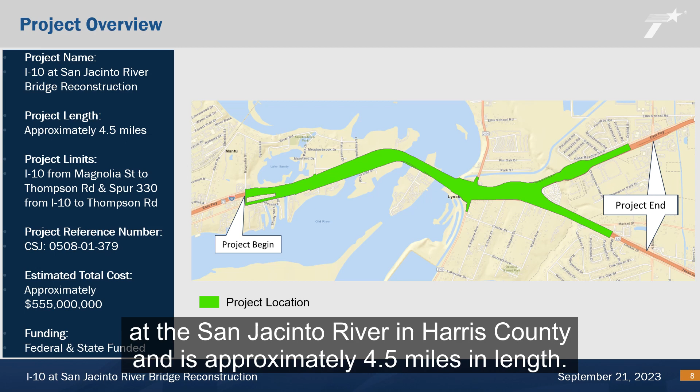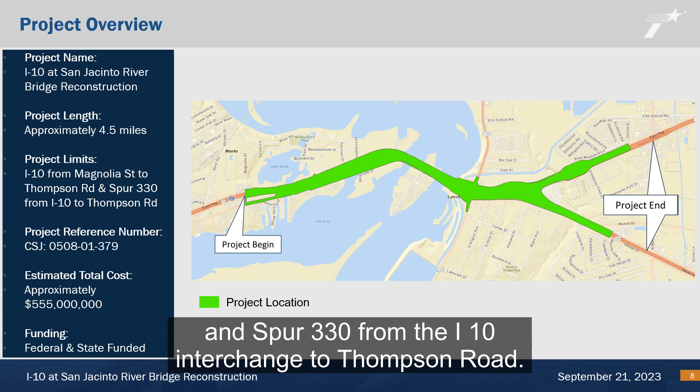The proposed project is located at I-10 at the San Jacinto River in Harris County and is approximately 4.5 miles in length. The project limits are I-10 from Magnolia Street to Thompson Road and Spur 330 from the I-10 interchange to Thompson Road, and the project reference number is CSJ 0508-01-379. The project is funded by federal and state funds, and the total project cost estimate is $555 million.

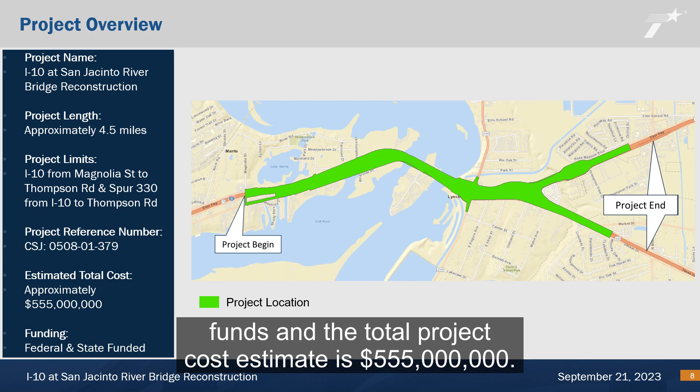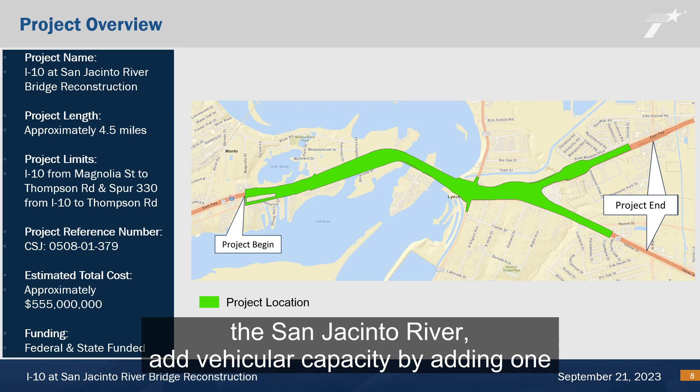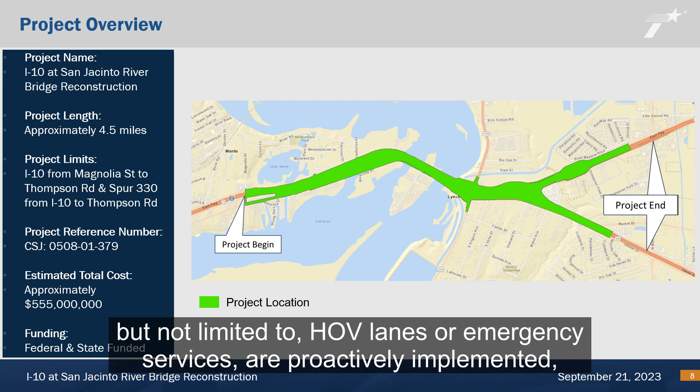The proposed project would replace the existing I-10 main lane bridges over the San Jacinto River, add vehicular capacity by adding one general purpose lane and two managed lanes in each direction. Managed lanes are highway lanes where operational strategies such as, but not limited to, HOV lanes or emergency services are proactively implemented and managed in response to changing conditions.

Proposed improvements along Spur 330 include widening to add one managed lane in each direction and connect to the proposed I-10 managed lanes. This information can also be found in the project handout for quick reference.

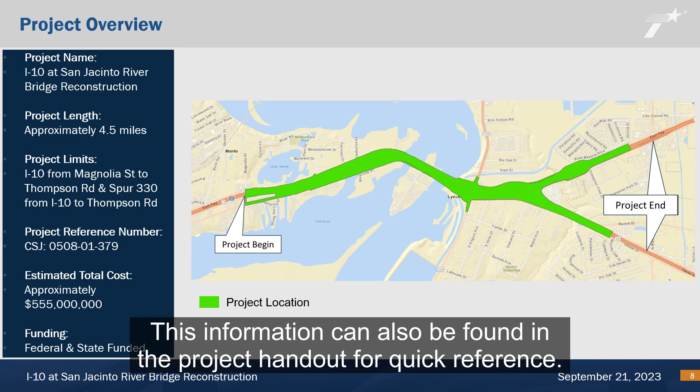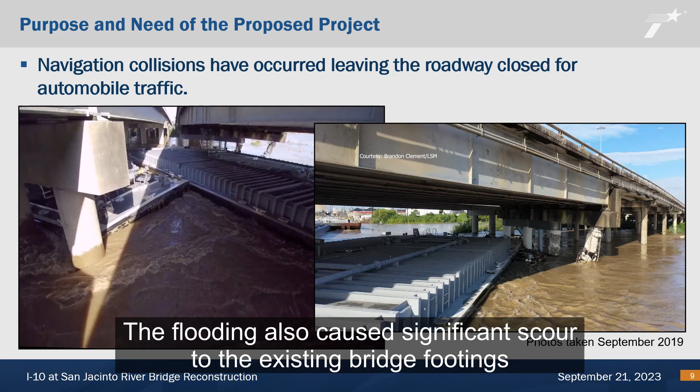In the next several slides, I will discuss the need for and purpose of the project. The flooding during Tropical Storm Imelda had several barges break their moorings and impact the existing bridge protection system, causing substantial damage. The flooding also caused significant scour to the existing bridge footings, causing the need for repair.

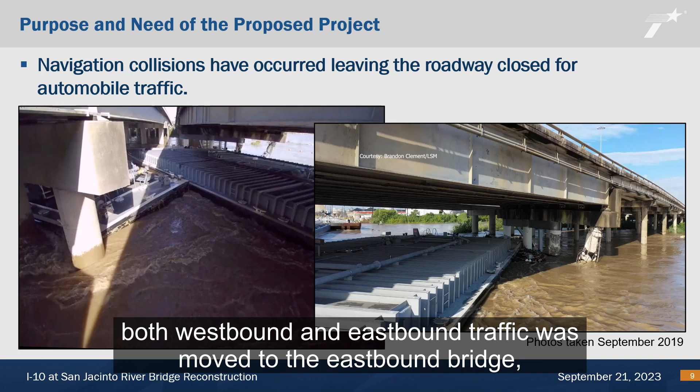During one of the barge strike incidents, the damage required the westbound main lanes to be closed during the repair. Both westbound and eastbound traffic was moved to the eastbound bridge, requiring lane reductions resulting in significant traffic delays.

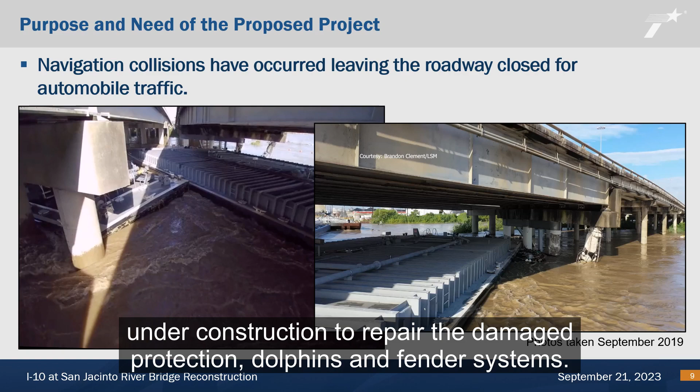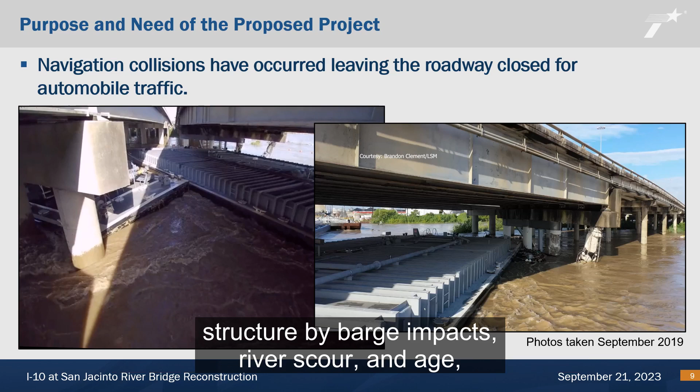Currently, there is a retrofit project under construction to repair the damaged protection dolphins and fender systems. The bridge structures currently in use were constructed in 1968 and 1996. Due to the frequent damage to the existing structure by barge impacts, river scour, and age, the bridges are programmed for replacement.

The Houston District has multiple planned projects along the I-10 corridor across the district. The managed lanes are programmed to run from I-69 to SH-99, a distance of almost 30 miles. Because replacement of the bridges over the San Jacinto River is the highest priority for the district, and due to the cost associated with constructing new bridge structures, it is preferred that the managed lanes be constructed at the same time as the bridge replacements. As such, this section of I-10 would be the first in the series of managed lanes to be evaluated. These managed lanes would help provide congestion relief within the project corridor itself.

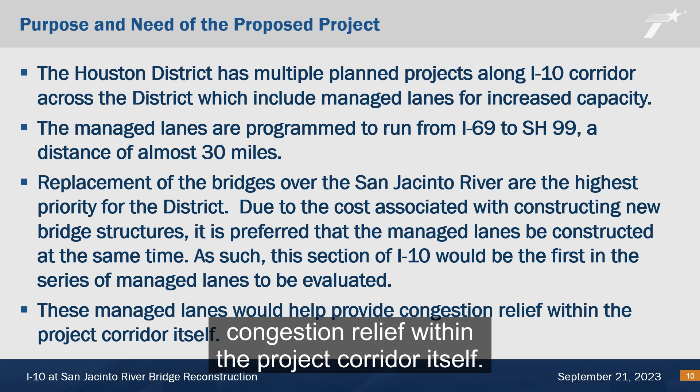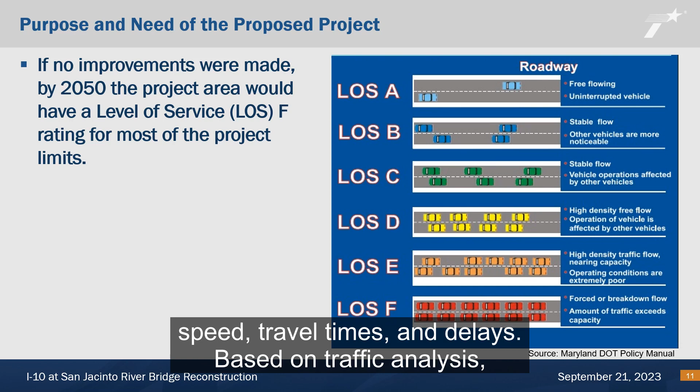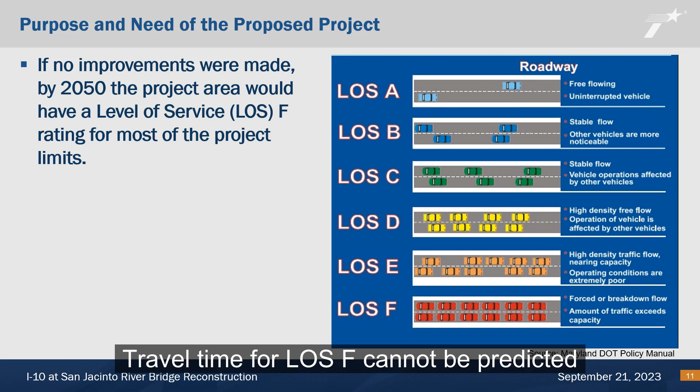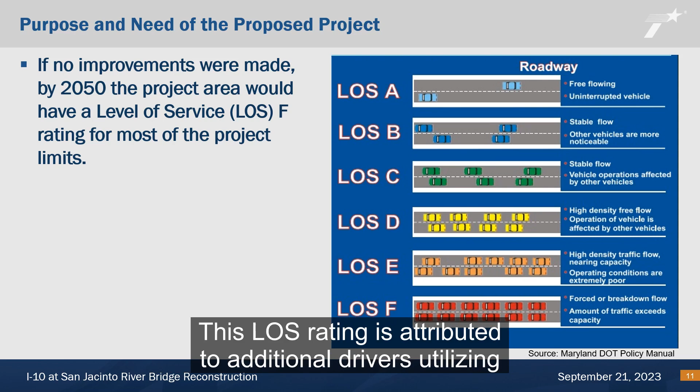Level of service, or LOS, describes conditions of a roadway based on driving speed, travel times, and delays. Based on traffic analysis, if no improvements are made by 2050, this section of I-10 is shown to have an LOS rating of F. An F rating is the worst rating possible in terms of LOS, meaning there are frequent slowdowns and traffic jams. Travel time for LOS F cannot be predicted as there is more demand than capacity on the roadway. This LOS rating is attributed to additional drivers utilizing the roadway than what is currently using the roadway today.

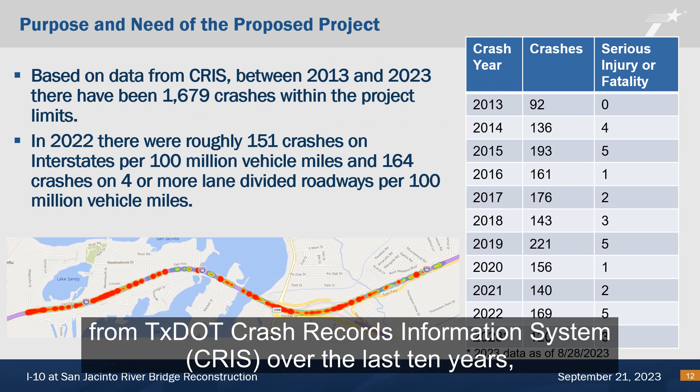Based on data from TxDOT's Crash Records Information System, CRIS, over the last 10 years, there have been 1,679 crashes within the project area along I-10. The heat map shows the areas of crashes with a fairly even distribution of location of crashes.

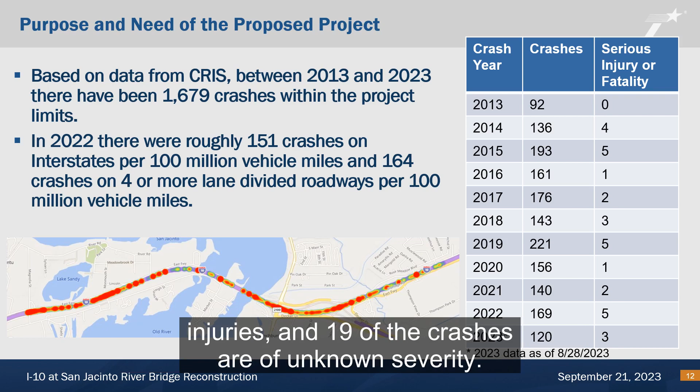As shown in the table, there have been over 100 crashes each year on this area of roadway since 2013. Note that there are already 120 crashes this year as of August 28th. Within the last 10 years, 31 of the crashes have resulted in serious injuries or fatalities. 284 crashes resulted in possible or minor injuries, and 19 of the crashes are of unknown severity.

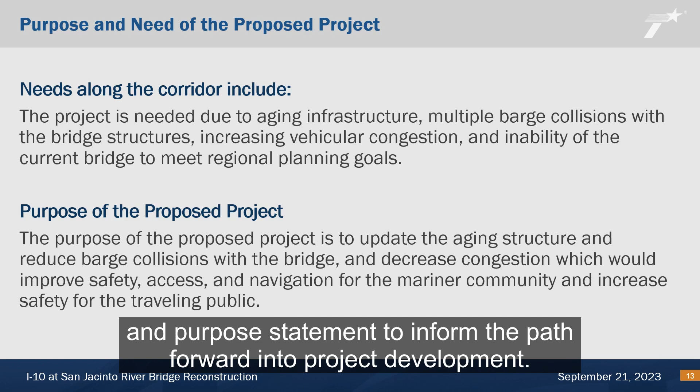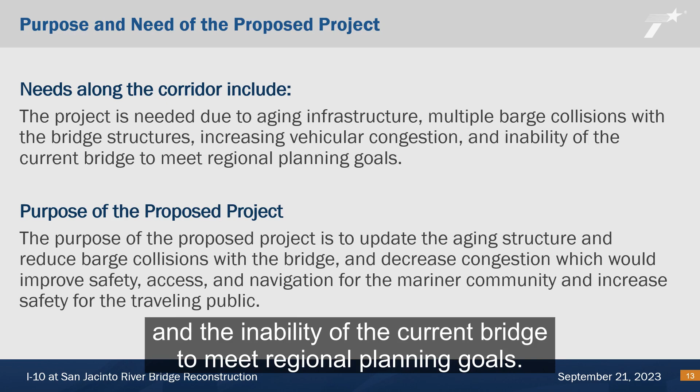After reviewing all the needs of the corridor, the project team developed a need and purpose statement to inform the path forward into project development. The proposed improvements would need to satisfy all the needs of the corridor and meet the purpose of the project. The project is needed due to aging infrastructure, multiple barge collisions with the bridge structures, increasing vehicular congestion, and the inability of the current bridge to meet regional planning goals.

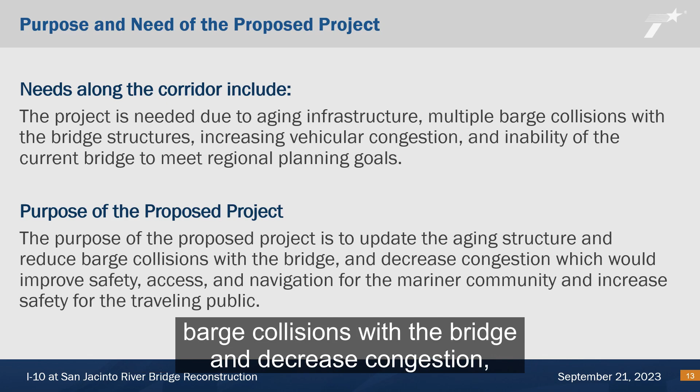The purpose of the proposed project is to update the aging structure and reduce barge collisions with the bridge, and decrease congestion, which would improve safety, access, and navigation for the mariner community, and increase safety for the traveling public.

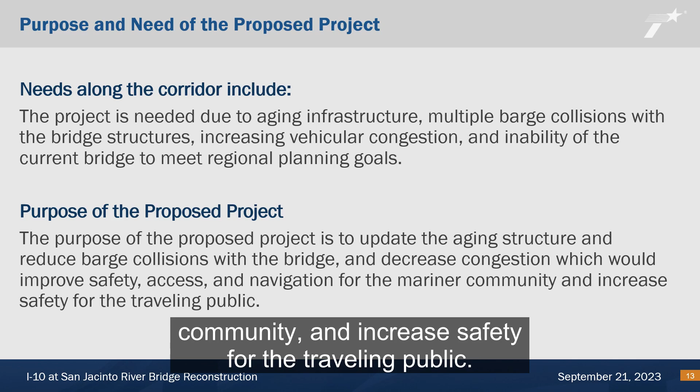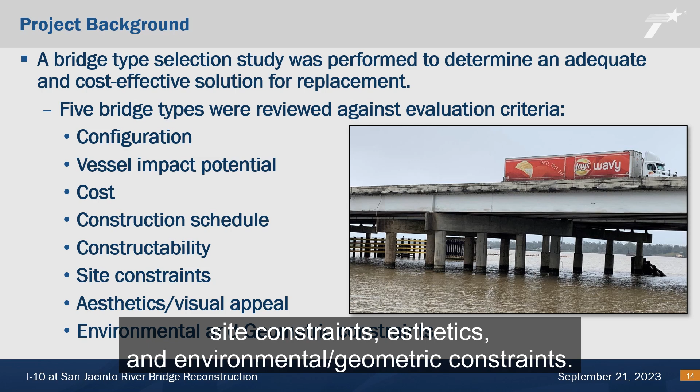A bridge type selection study was performed to determine an adequate and cost-effective solution for replacement. 5 bridge types were reviewed utilizing set evaluation criteria. Evaluation criteria categories included configuration, vessel impact potential, cost, construction schedule, constructability, site constraints, aesthetics, and environmental/geometric constraints. After evaluation of all criteria, concrete girder bridges, like the one shown on this slide, were recommended for the new bridges.

A navigational clearances report was prepared to review waterway obstructions with existing clearance envelopes, limited vessel survey, and marine facilities within a 3-mile radius of the proposed project.

TxDOT completed outreach efforts to notify the surrounding mariner community about the upcoming bridge replacement and to collect stakeholder input. The outreach efforts included identifying the appropriate mariner community stakeholders, holding a virtual meeting with presentation, and sending a navigational questionnaire to the mariner community stakeholders. The virtual meeting occurred in August 2021, and the navigational questionnaire was sent to 70 members of the mariner community in August and November 2021.

After the initial mariner community stakeholder outreach efforts, TxDOT developed bridge design alternatives and presented feasible options to the Lone Star Harbor Safety Committee in June and July 2022. The questionnaire was sent to the mariner community again after the June 2022 meeting with the Lone Star Harbor Safety Committee.

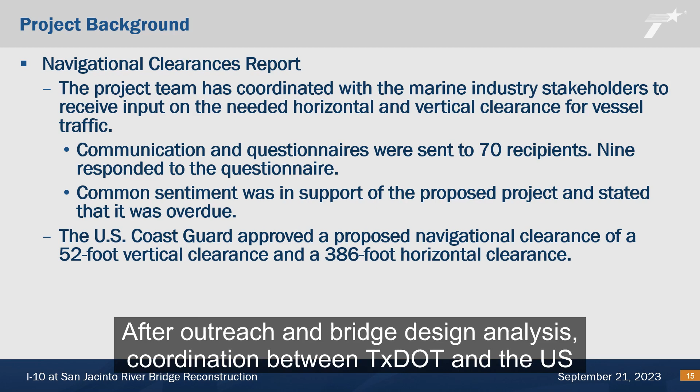After outreach and bridge design analysis, coordination between TxDOT and the U.S. Coast Guard, USCG, occurred. Through this coordination, USCG approved the proposed navigational clearance, consisting of a 52-foot vertical clearance and a 386-foot horizontal clearance.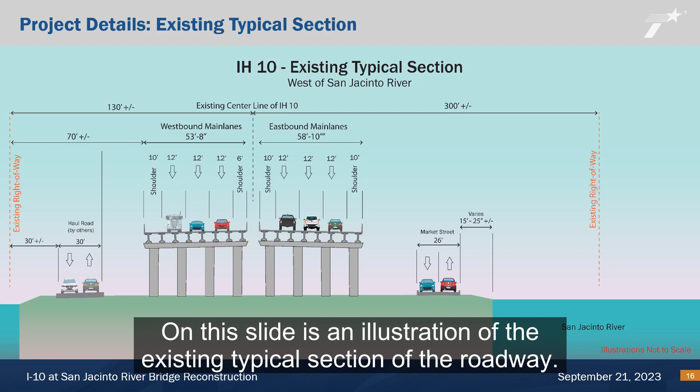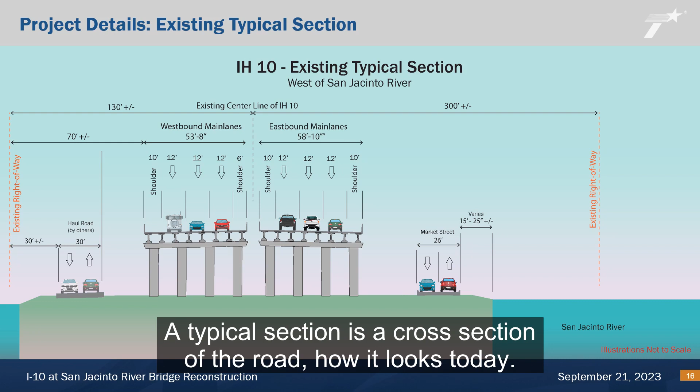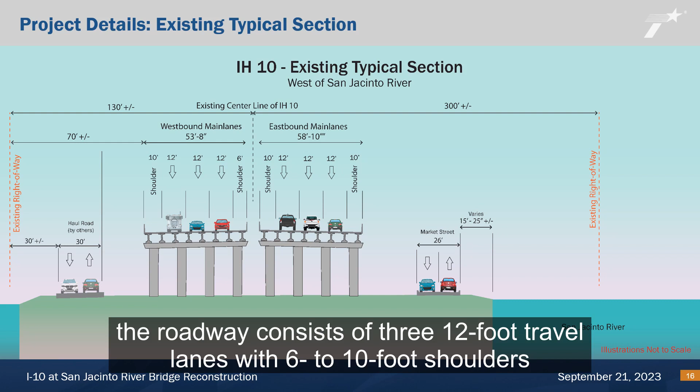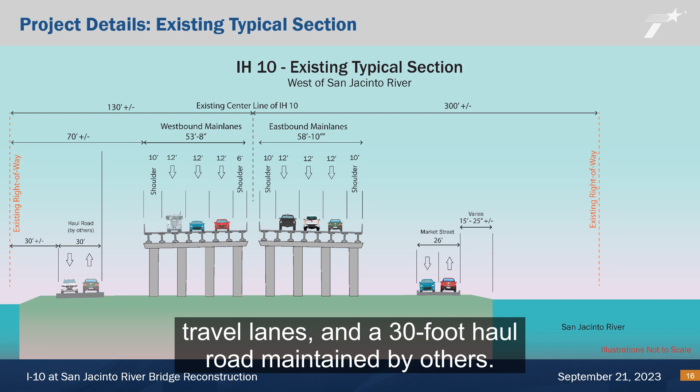On this slide is an illustration of the existing typical section of the roadway. A typical section is a cross-section of the road how it looks today. The roadway main lane and frontage roads vary in number and configuration, but at this location, just west of the river crossing, the roadway consists of 3 12-foot travel lanes with 6 to 10-foot shoulders in each direction, Market Street, consisting of 2 13-foot travel lanes, and a 30-foot haul road, maintained by others. The right-of-way varies throughout the corridor as well.

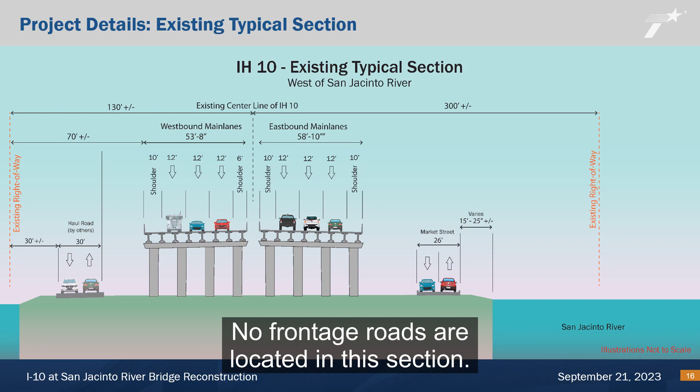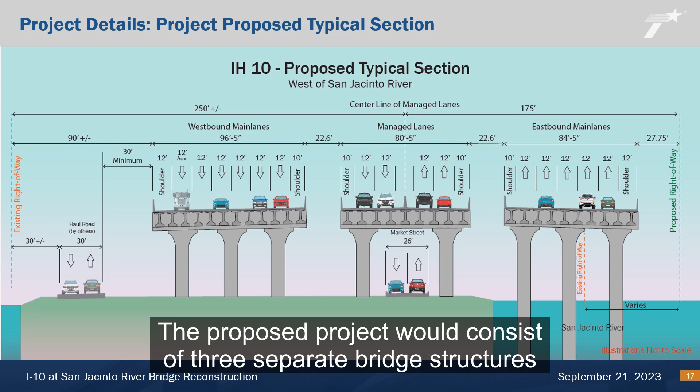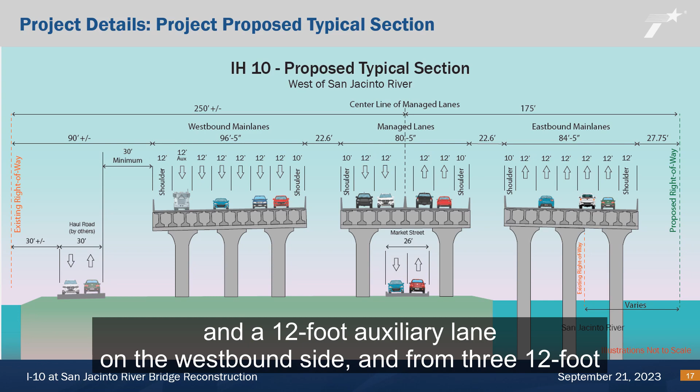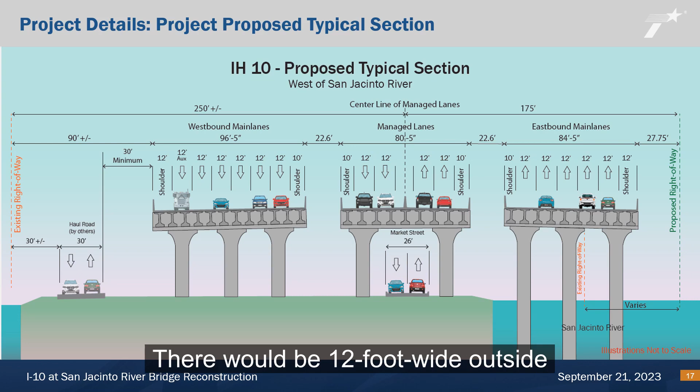This slide illustrates the proposed typical section, or a cross-section of what the road would look like with the proposed project. No frontage roads are located in this section. The proposed project would consist of 3 separate bridge structures and would widen the main lanes from 3 12-foot travel lanes to 5 12-foot travel lanes, and a 12-foot auxiliary lane on the westbound side, and from 3 12-foot travel lanes to 5 12-foot travel lanes on the eastbound side. There would be 12-foot wide outside shoulders and 10-foot wide inside shoulders on both east and westbound travel lanes.

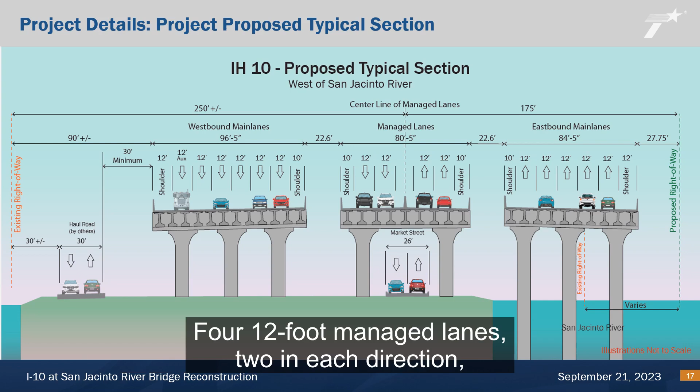Four 12-foot managed lanes, two in each direction, would be between the eastbound and westbound main lanes, with a 5-foot barriered separation and 10-foot outside shoulders.

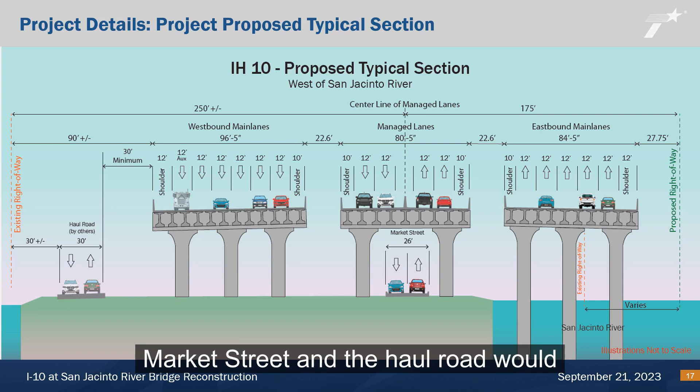Market Street and the haul road would remain unchanged at this specific location, just west of the San Jacinto River.

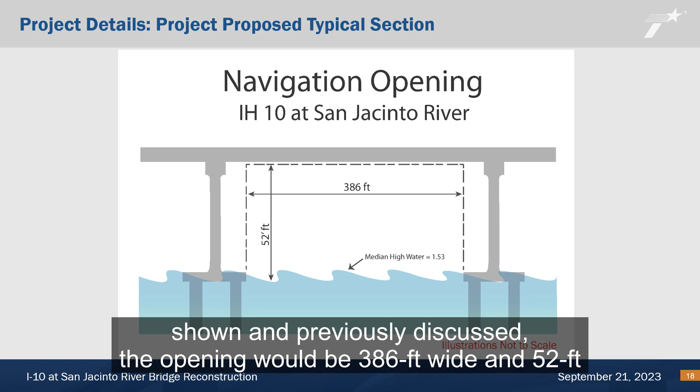This graphic illustrates the proposed navigation opening if the proposed project is constructed. As shown and previously discussed, the opening would be 386 feet wide and 52 feet high, with the median high water mark being 1.53 feet.

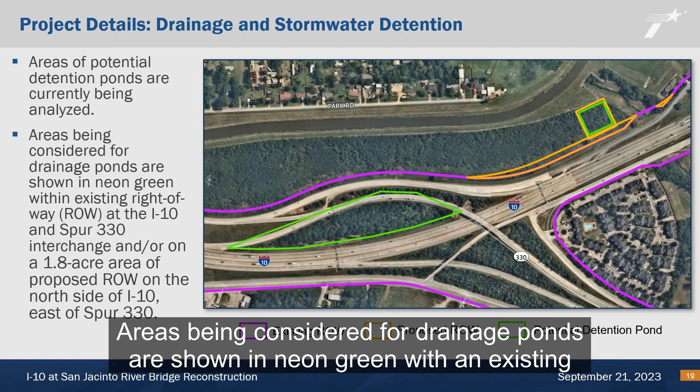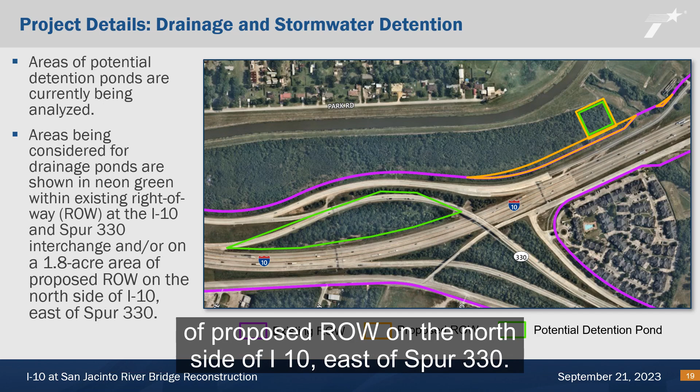Areas of potential detention ponds are currently being analyzed. Areas being considered for drainage ponds are shown in neon green within existing right-of-way at the I-10 and Spur 330 interchange, and/or on a 1.8 acre area of proposed right-of-way on the north side of I-10, east of Spur 330. The proposed project would require approximately 5.4 acres of new right-of-way.

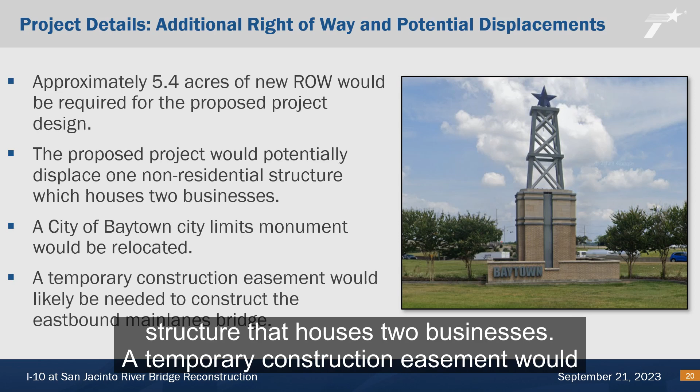Additionally, the proposed project would potentially displace one non-residential structure that houses 2 businesses. A temporary construction easement would likely be needed to construct the eastbound main lane bridge. The areas in orange are the areas where additional right-of-way would be needed for the project.

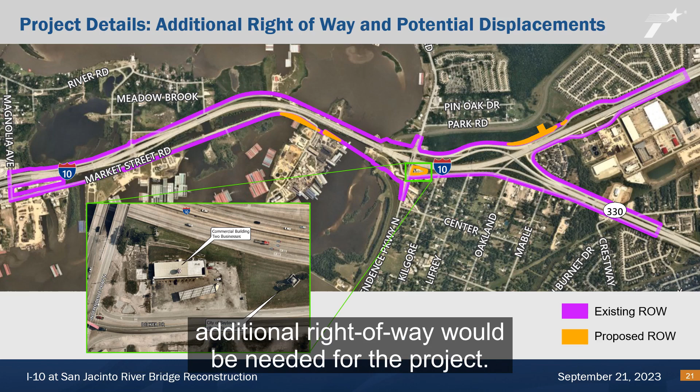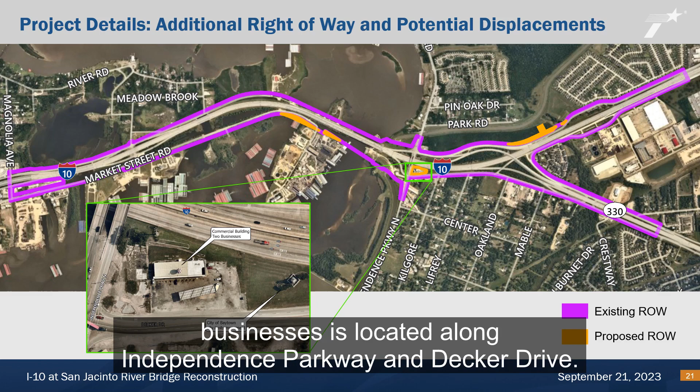The potential displacement of the one non-residential structure that houses 2 businesses is located along Independence Parkway and Decker Drive. The City of Baytown Monument is within the same area.

The project team is identifying and evaluating potential environmental impacts that could occur as a result of constructing the proposed project. Areas that are under review include biological resources, community impacts, environmental justice, water resources, hazardous materials, archaeological resources, historic resources, and traffic noise.

The project would be designed to avoid or minimize impacts to the greatest amount practicable. Once completed, technical reports documenting the analysis and conclusions of these studies will be available for review upon request.

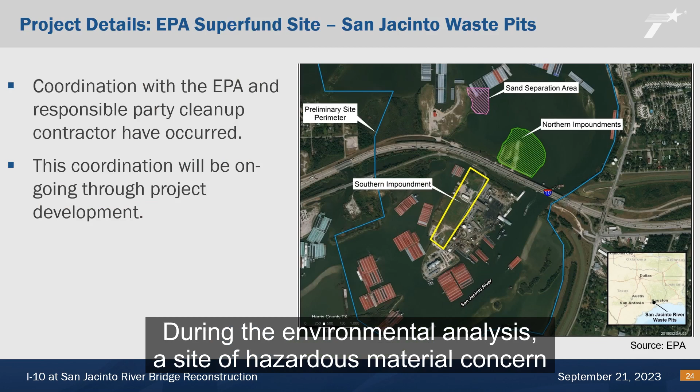During the environmental analysis, a site of hazardous material concern called the San Jacinto Waste Pits was identified. These areas are classified by the Environmental Protection Agency, EPA, as a Superfund site. A Superfund site is the common name given to areas with known hazardous waste contamination.

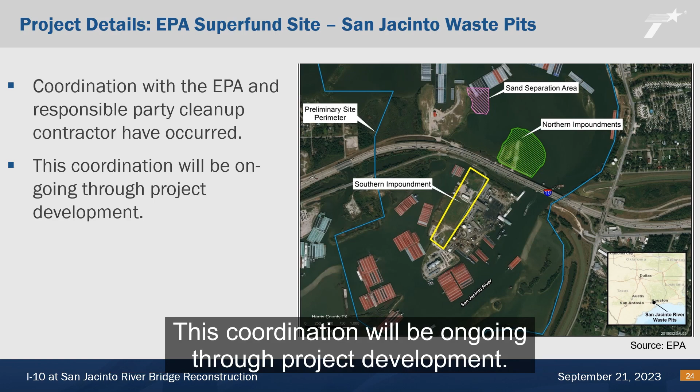Please visit www.epa.gov/tx/SJRWP for more information on this site specifically. Coordination with the EPA and responsible party cleanup contractor have occurred. This coordination will be ongoing through project development.

The proposed project would be funded with a combination of federal and state funds for a total of approximately $555 million.

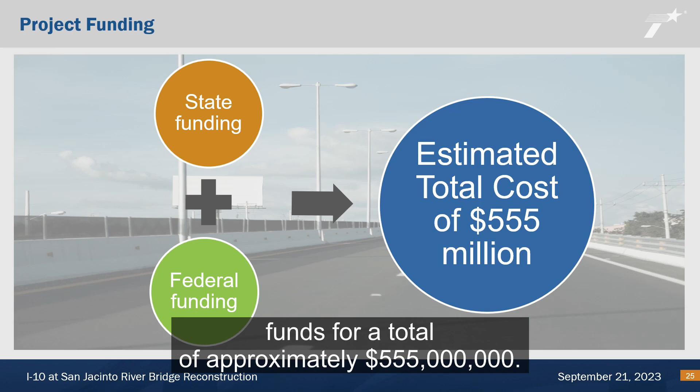The next steps include receiving an environmental decision, beginning detailed design activities, and acquiring right-of-way. Design completion is anticipated for fall 2024, and a letting date is anticipated for fall 2027. The project team estimates that the construction would take approximately 5 years.

TxDOT encourages you to review the materials regarding the proposed project and provide feedback. You may submit comments in the following ways.